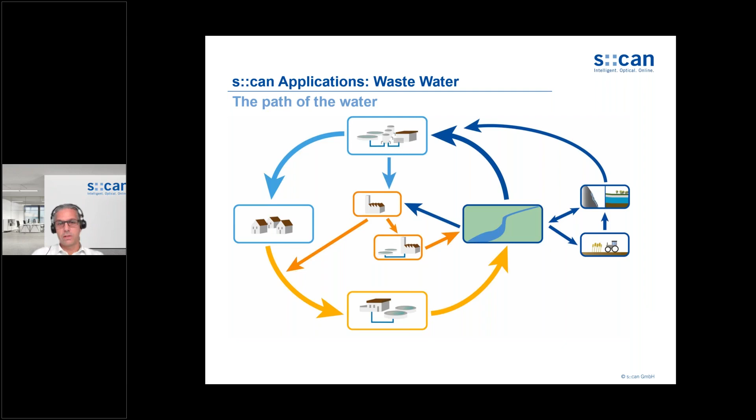At first, a short story about the path of the water, how the water circulates in the water industry.

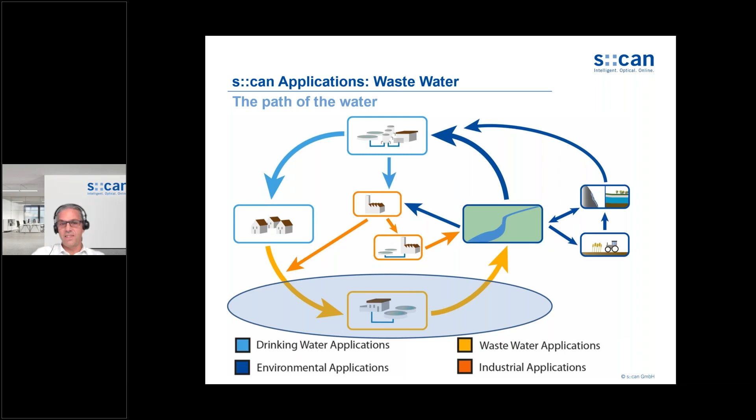The drinking water utility, you can see it on the top, produces drinking water. This drinking water is supplied to households as well as to industry, following the light blue arrows. The households and the industry consume the drinking water and turn it to wastewater—shown by the orange arrows—and this is the part we will have a look at today. After the wastewater treatment plant treats the wastewater, it's released to natural waters, and these natural waters are used again by the drinking water plants.

Here we can see a wastewater treatment plant. We from s::can can divide the wastewater applications into 4 typical applications. The first is the sewer system. The second is the influent of the wastewater treatment plant. The third is the biological treatment of the wastewater. And the fourth application is the final effluent of the wastewater.

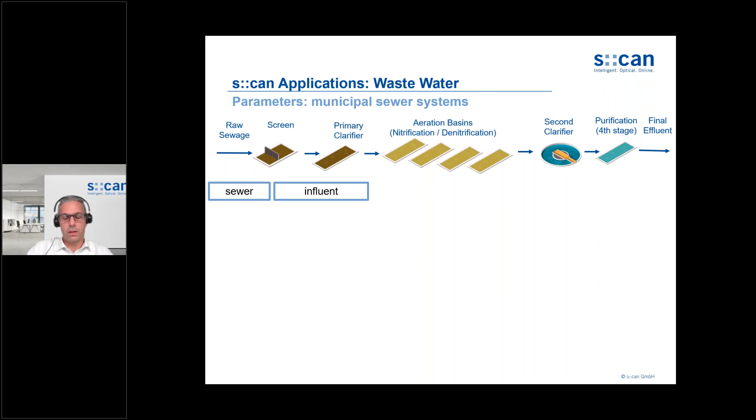Here you can see the wastewater treatment plant a bit more in detail. In the beginning, the raw sewage is cleaned by the screen and the solids are settling in the primary clarifier. These two applications we call sewer and influent application, and typically the following parameters are monitored: organics, either COD or BOD or UV254, suspended solids, TSS, hydrogen sulfide, and ammonium.

The next stage is the biological treatment. In the aeration basins, the ammonium is converted into nitrate, and the COD, the organics, is consumed. Typical parameters monitored here are the total solids, the nitrate, sometimes the nitrite, the ammonium, of course the dissolved oxygen, and the pH.

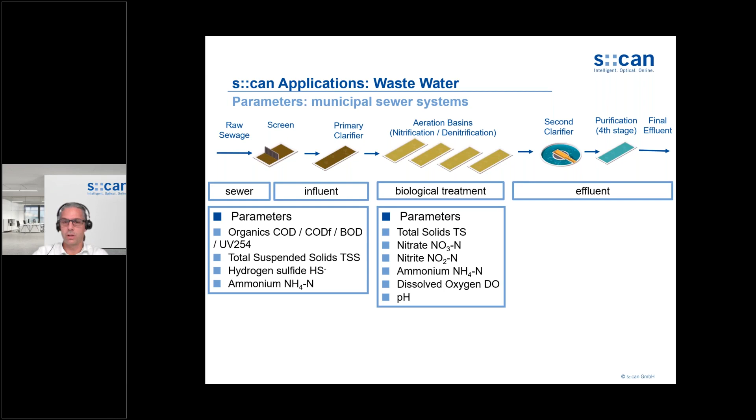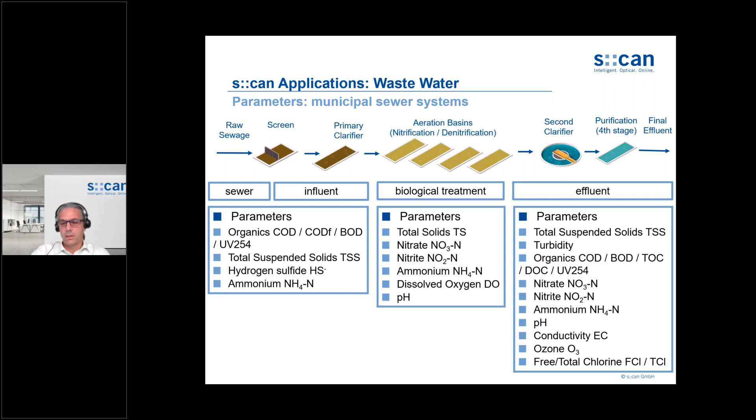After the biological treatment, the second clarifier and sometimes also an advanced treatment, the so-called fourth stage treatment, takes place before the wastewater is released to the rivers. Typical parameters monitored here are solids or turbidity, organics again, nitrate, ammonia, all the species of nitrogen, pH, conductivity, and if there is a disinfection, also ozone and free and total chlorine are commonly monitored here.

In the sewer systems, we have the following applications. We do pollution load monitoring, compliance monitoring driven by government, combined sewer overflow monitoring. This is highlighted blue because we will have a detailed look at this today. We try to detect untypical discharges, contamination. It goes up to identifying industrial discharges that are polluting the wastewater. And last but not least, prevention of corrosion damage and smell control.

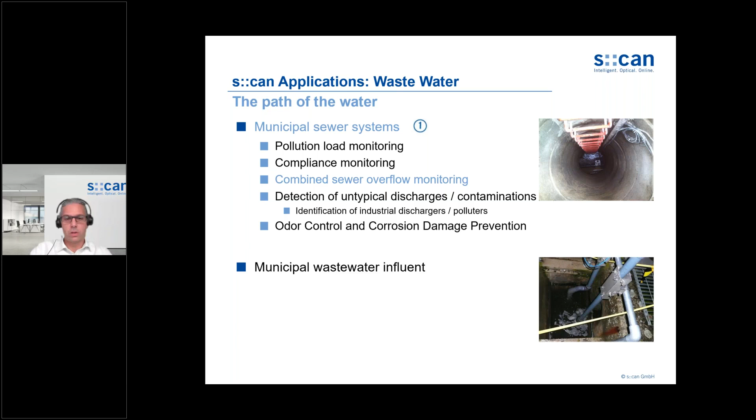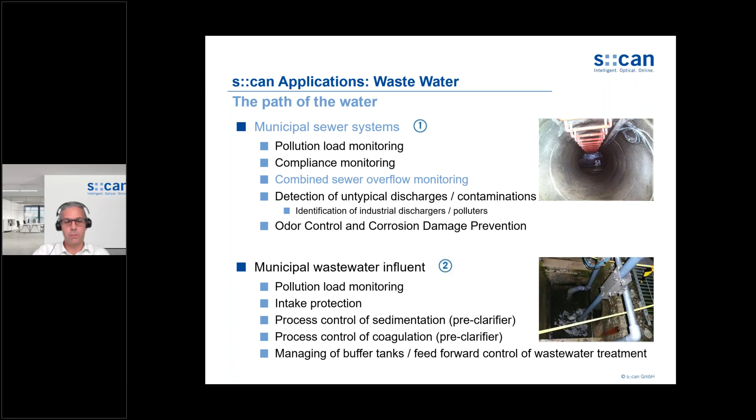In the wastewater plant, the first station is the influent. We are monitoring here again the pollution load. We try to protect the plant from too much water or toxic events, especially since the biological treatment can be endangered by toxic substances. The process control of the sedimentation or the coagulation taking place in the first clarifier can be process controlled, and buffer tanks can be managed at this location.

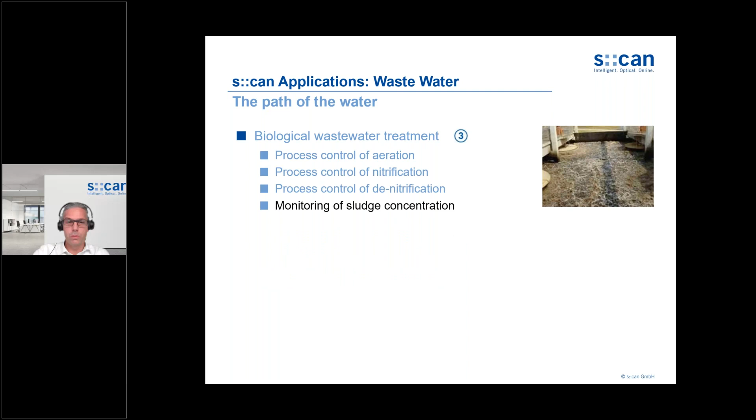Now the water goes to the biological wastewater treatment, and what we are doing here is controlling the process of the aeration, the nitrification, the denitrification, and we are monitoring the sludge concentration.

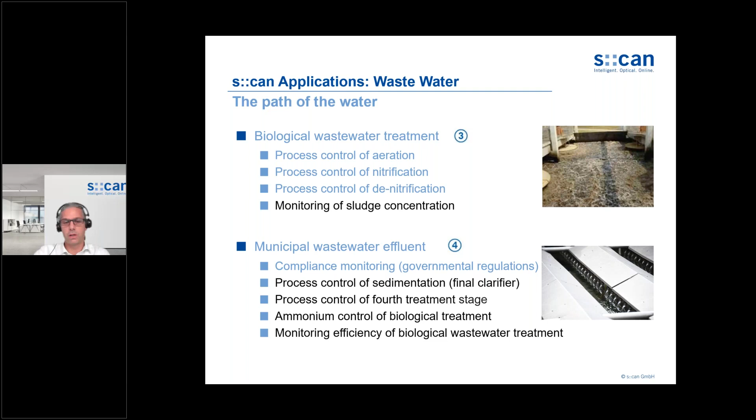In the effluent, the water is already cleaned. Compliance monitoring is a big point here. Government forces the wastewater treatment plants to monitor their effluent. The process control of sedimentation taking place in the final clarifier, controlling the fourth treatment stage if present, the ammonium control of the biological treatment, and of course the efficiency of the complete biological wastewater treatment.

Now we go directly to applications, and we start with the sewer systems, point one in this slide.

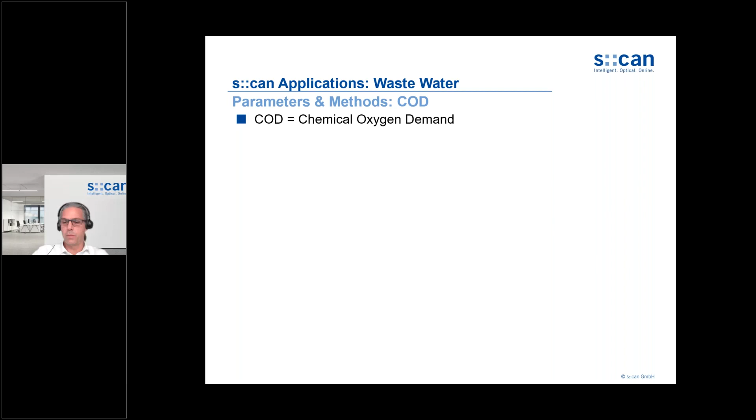Before doing so, I want to highlight the most important parameter in the wastewater world, and this is the chemical oxygen demand. The chemical oxygen demand is not a concentration of organics, but rather it's the oxygen that is consumed by those organic substances per volume of water. The method is oxidizing chemically all organic and also some inorganic compounds of a water sample, and it's broadly used as a non-specific indicator for the pollution of wastewater with organics.

The COD can both result from natural sources or from human sources, and it consists both of dissolved and particulate matter.

The COD is monitored in wastewaters and also in environmental applications to ensure the regulations of government are met, to control the biological treatment processes of the wastewater, to protect natural waters, but also the intake of wastewater treatment plants, and to monitor the COD load resulting from industrial effluents. Each and every wastewater treatment plant monitors the COD, so it's really broadly used worldwide.

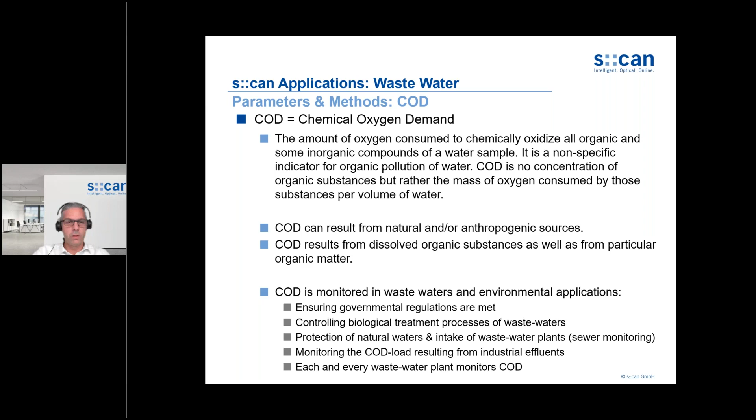The laboratory analyzes the COD by taking samples of water. The carbon is oxidized chemically, and the oxidant that is not consumed is measured. Some inorganics, e.g. chloride, can falsify the results, and many laboratories are using not the standard lab method, but rather quick tests instead.

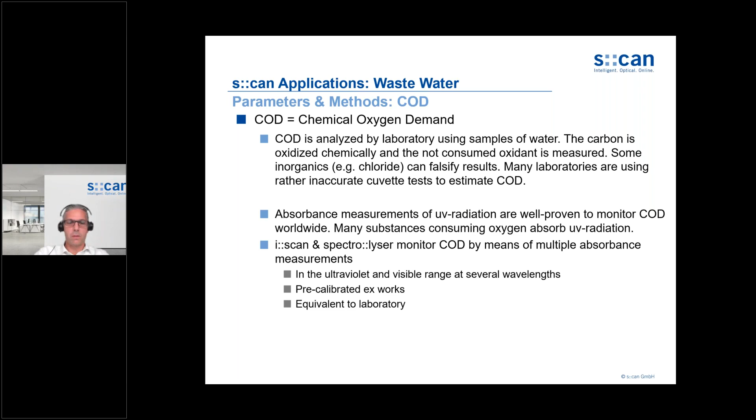Absorbance measurements are well proven to monitor COD worldwide. Many substances that are consuming oxygen are also absorbing UV radiation. That's why we can monitor it with our instrumentation. The i::scan, the spectro::lyser, they monitor the COD by means of many wavelengths of absorbance in the UV range and in the visible range. It is pre-calibrated ex-works and is equivalent to laboratory results.

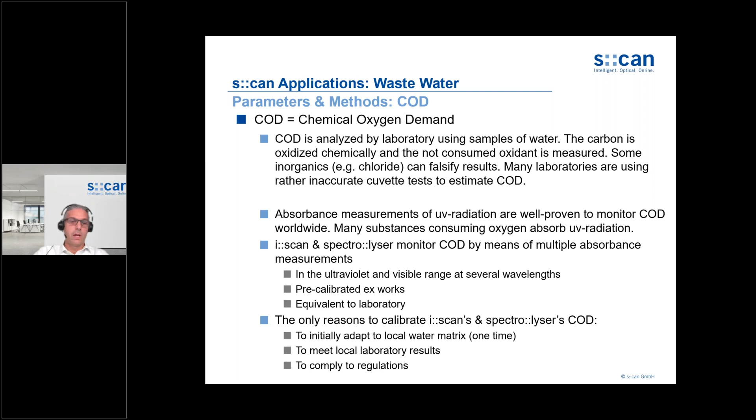There are a few reasons to calibrate the COD measurement of the i::scan and the spectro::lysers. Aging is not a reason to calibrate it on a periodical basis. The reasons are to initially adapt to the local water matrix. This is done one time during installation, to meet the results of the local lab and to comply with regulations.

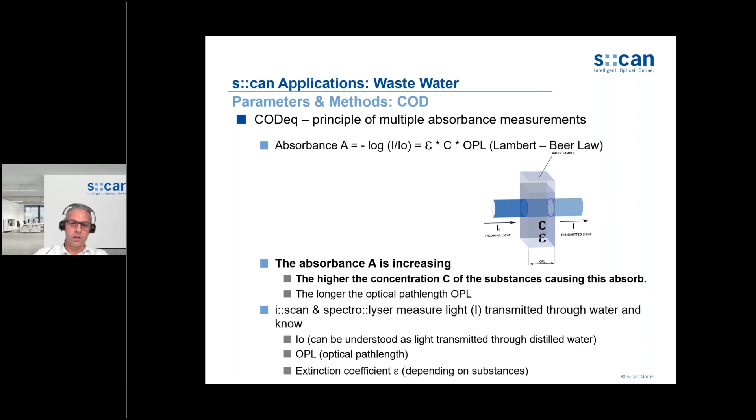Here you can see how we monitor the COD. I won't go into the details now, but the most important sentence is highlighted in bold letters: the higher the concentration of the substance causing this absorbance, the higher the reading. That means the concentration causing the absorbance can be monitored by absorbance measurement.

Now back to the sewer systems. What are the measurement goals and what is the purpose to monitor in sewer systems? Pollution load monitoring, compliance monitoring, industrial dischargers monitoring, detection of untypical discharges and contaminations, combined sewer overflow monitoring, smelling control, corrosion damage prevention, and managing sewer retention and buffer basins.

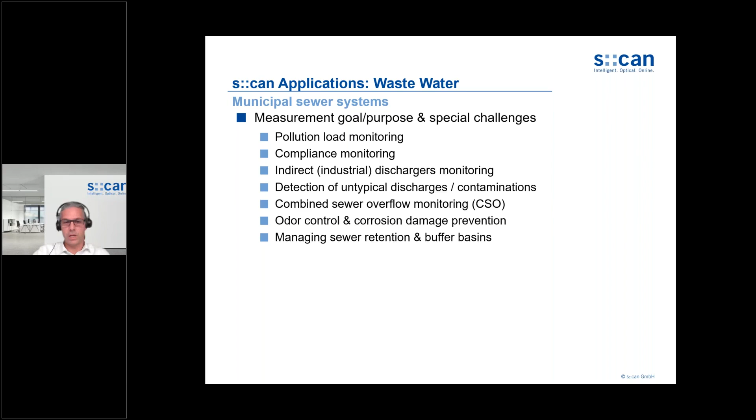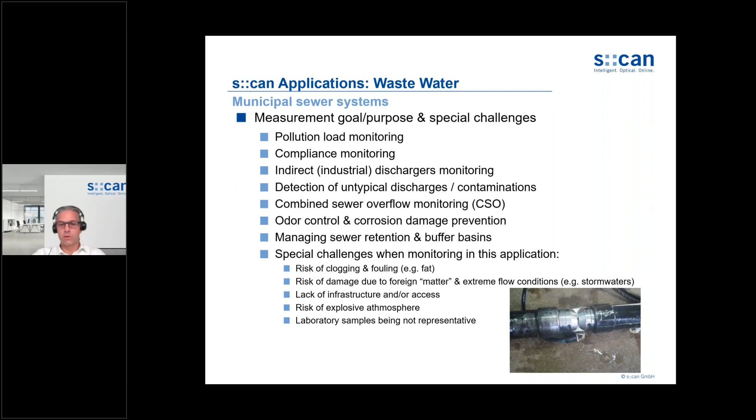What are the special challenges here? The special challenges when monitoring in this application are the risk of clogging and fouling, e.g. fat can cause window fouling, the risk of damage due to foreign matter and extreme flow conditions. We will come to this. Lack of infrastructure and access, risk of explosive atmosphere, and laboratory samples being not representative.

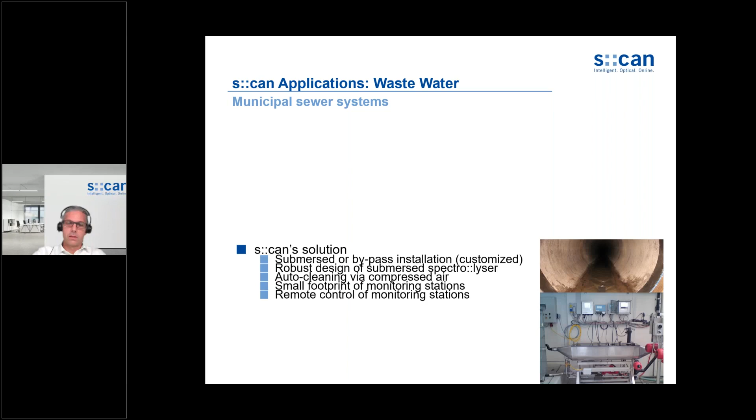The s::can solution for this application is either a submerged installation or a bypass installation. You can see the pictures on the right-hand side. The spectrolyzer is very robust in design and can withstand the harshest conditions in the sewer. Auto cleaning is typically done via compressed air.

Sorry, I was too fast now.

Victoria, may I ask you to take over, and now it's here. Of course. Can you go back one slide? Another slide back, please.

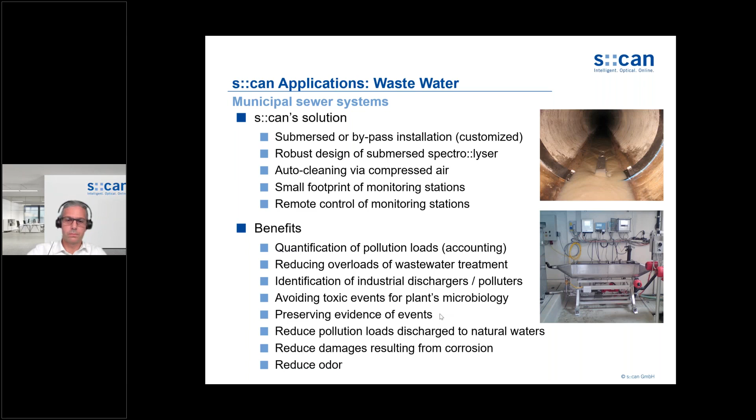Here you can see the product configuration we use typically. We use the spectrolyzer industrial, sometimes a non-standard pontoon or open tanks. You could see the pictures on the last slide.

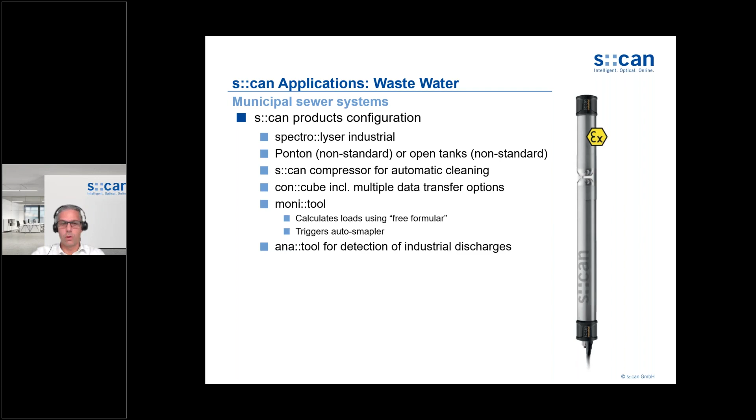The s::can compressor for automatic cleaning, the con::cube with its multiple data transfer options, moni::tool software, which can calculate loads using the free formula. That means we can simply integrate flow meters from our new sister companies and calculate the load by multiplying COD with the flow. We can also trigger an autosampler using the moni::tool software. ana::tool, the special software, is used for detection of industrial discharges.

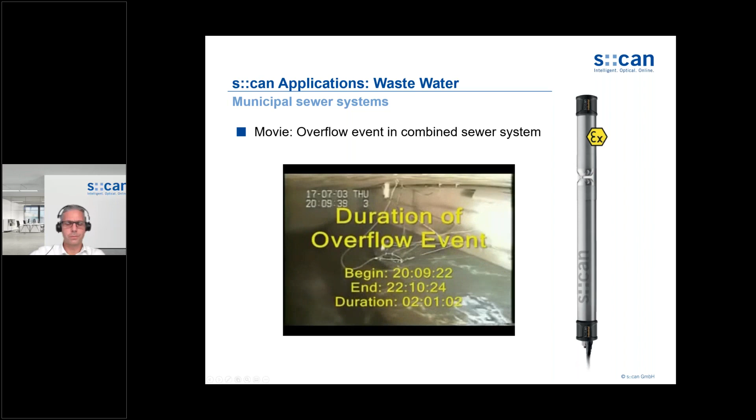Here we can see an overflow event in a combined sewer system. You can see how the water flow increases over time. The swimming boat carries the spectrolyzer, and the flow is getting worse and worse, and like a surfboard, the instrument is still running and monitoring.

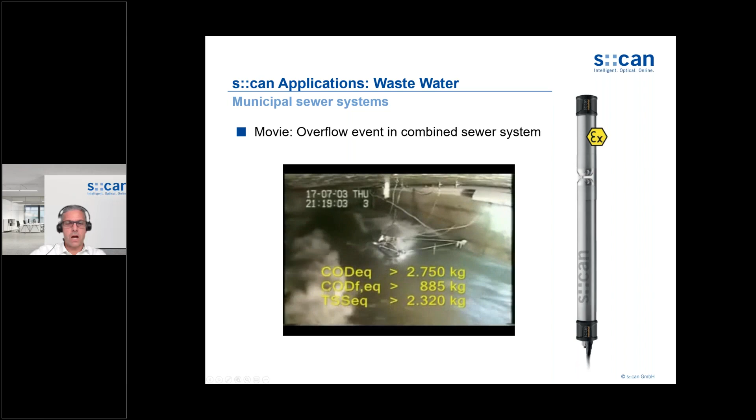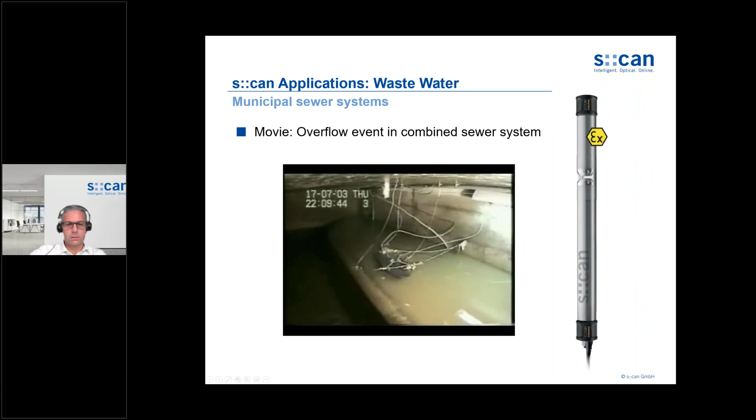Now you cannot see it anymore, but it's still there and giving results. Now the rainfall stopped and thus the flow is reduced, and finally the instrument is in good condition and did provide results all the time.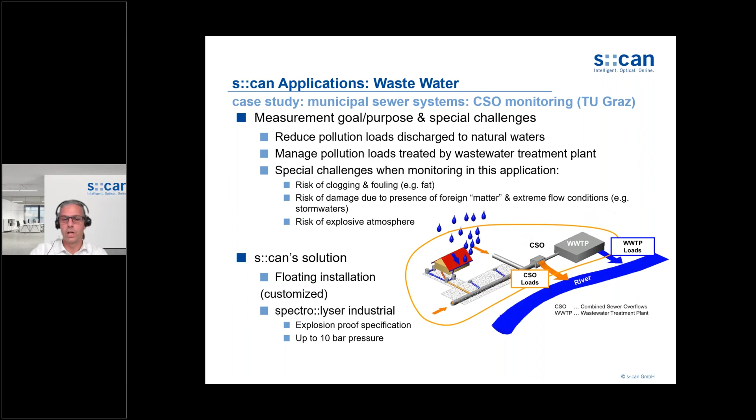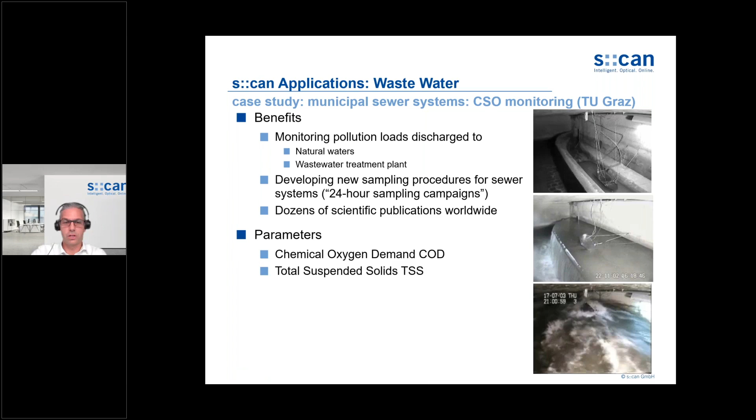Here you can see some pictures from the movie you've seen before. The benefits for this customer were to monitor the pollution loads discharged both to natural waters and to the wastewater treatment plant. They developed a new sampling procedure for sewer systems, calling it 24-hour sampling campaigns, and they published dozens of scientific publications worldwide. The parameters monitored were chemical oxygen demand and solids.

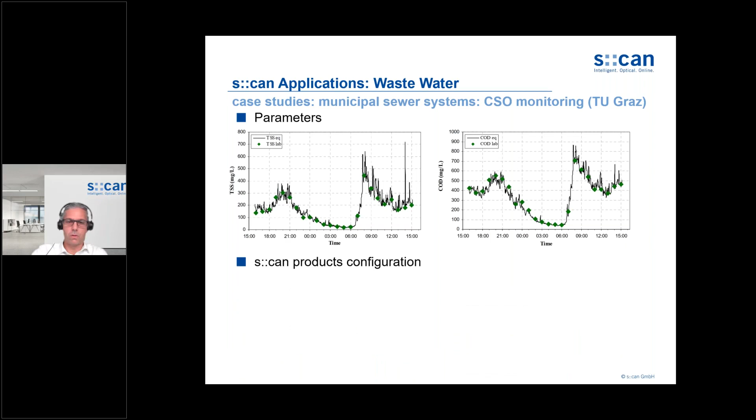Here you can see some parameter results over 2 days, and the configuration they used was spectro::lyser industrial with global calibration influent. They also did an advanced local calibration. Our colleagues supported them, and in this way we were able to match the laboratory very, very precisely.

The s::can ponton, a customized solution for installation, was used. The s::can compressor for automatic cleaning was used, and the con::stat was used—this was the older model of the con::cube nowadays.

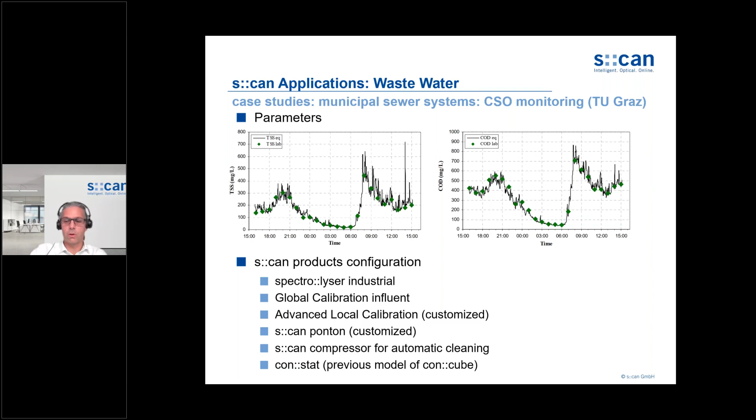The most important goal in this application is to reduce the operational costs. The blowers producing the air are by far the most important cost factor because they consume a lot of energy. Therefore, the process control of the aeration is very important. Of course, the control of the nitrification and denitrification and the monitoring of the sludge concentrations are important as well.

Special challenges when monitoring this application is that the processes of the microbiology are very fast, and therefore it's required to monitor in situ. The sensors have to be properly positioned in the basins to be able to catch really representative water qualities. Different processes can take place in one basin.

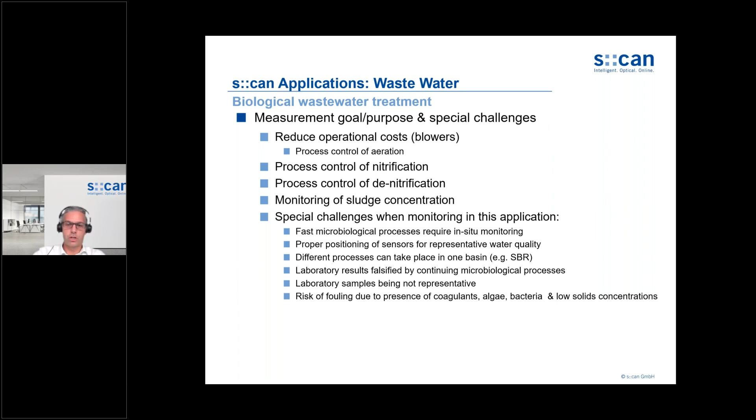Laboratory results are often falsified by processes ongoing after sampling. The laboratory samples are often not representative, and there is a certain risk of fouling due to the coagulants, bacteria, and algae, and the solids concentration being already pretty low.

Here you can see our solution is a submerged installation. There is no use to pump the water out of the biological treatment reactor. This will be completely wrong and lead to false results. And the compressor for automatic cleaning, you can see in the picture to the right that the cleaning works efficiently.

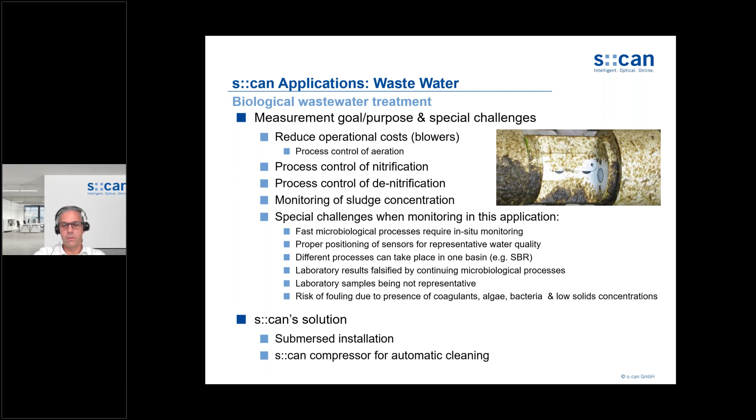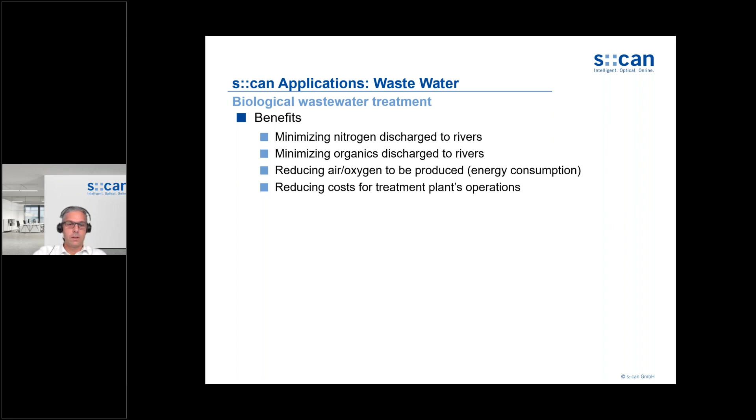What are the benefits for the customer? Minimizing the organics and the nitrogen discharged to the natural waters, reducing the air and oxygen to be produced. Energy consumption is a big point here. Reducing the costs for treatment plants operation is the main driver for this.

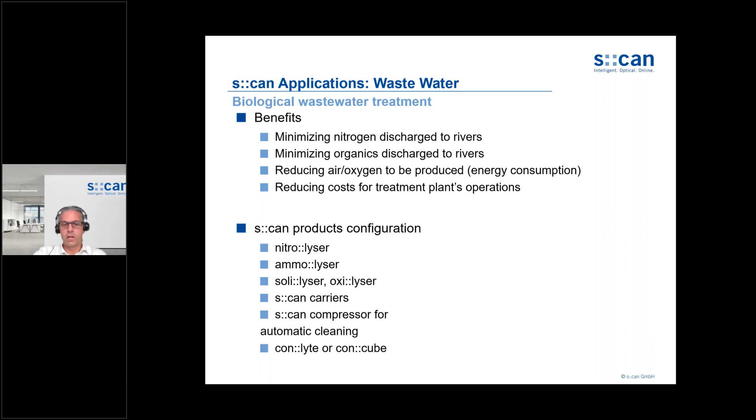Typical products we use in this application is the nitrolyzer to monitor nitrate and solids, the ammolyzer to monitor ammonia, the solilyzer for solids, the oxylyzer for oxygen. For submerged installation, we use the carriers. For automatic cleaning, we use S-can compressor. And as a terminal, both the conlyte and the con cube are used.

Here you can see some results. Red, you can see the oxygen. Blue, you can see the ammonia monitored by the ammolyzer, the oxygen monitored by the oxylyzer, and you can see the aeration cycles driving the nitrification.

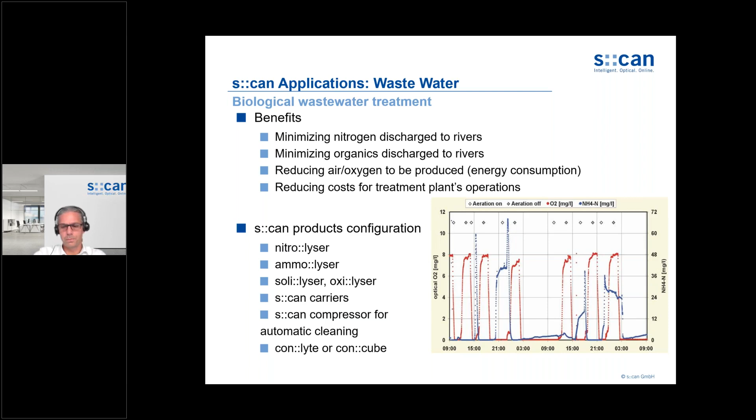A case study in this respect is a wastewater utility in Colorado Springs. As you can see here, the operators are pretty happy with our solution, and they even mentioned that they were able to lower the daily operational costs by means of our products.

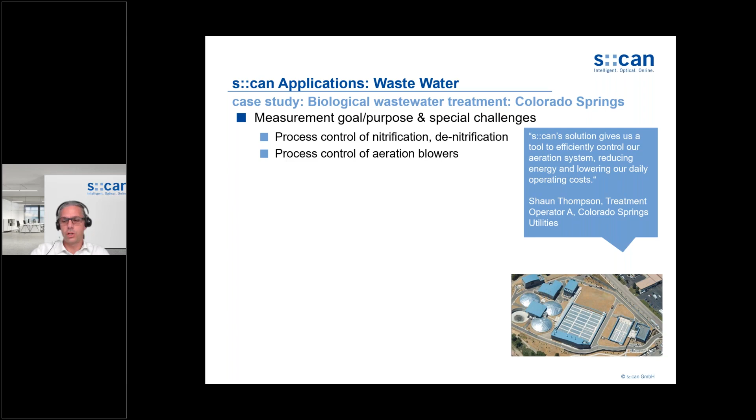What are the goals in this case study? To process control nitrification and denitrification and the aeration blowers.

Special challenges when monitoring these applications was the distance in between the sensors and terminals. Based on the design of the plant, there was a big distance in between the terminals and the sensors, and we had to overcome this.

Our solution here was nitrolyzer, ammolyzer, and oxylyzer being submerged in the aeration tanks. The data transmission was done via radios to the concube. This was a customized solution. The auto cleaning, as typical in this application, via compressed air.

The benefits for the customer were to optimize the nitrate elimination by the bugs, low maintenance efforts and easy installation, and they reduced the operating costs significantly.

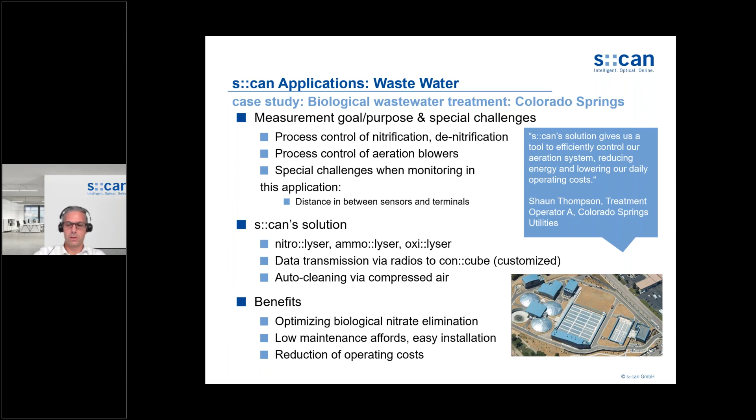The parameters monitored here were nitrate, solids, ammonium, pH, and dissolved oxygen. In the graphics, you can see green the ammonia and blue the nitrate. Dissolved oxygen is red, and you can clearly see the periods of aeration and the nitrification following exactly the periods of this aeration. Ammolyzer, oxylyzer, nitrolyzer, and concube were used in this case study.

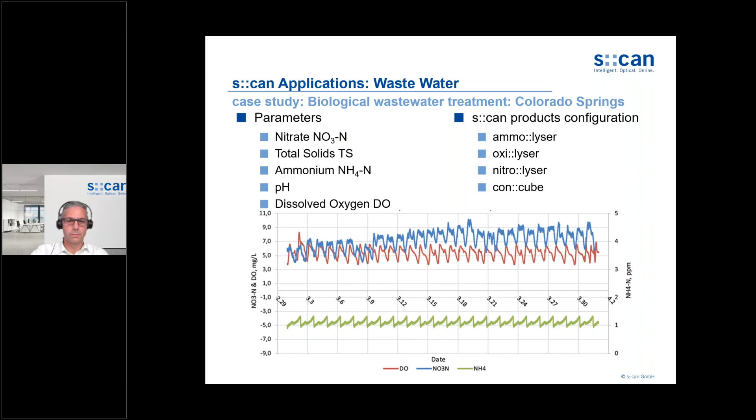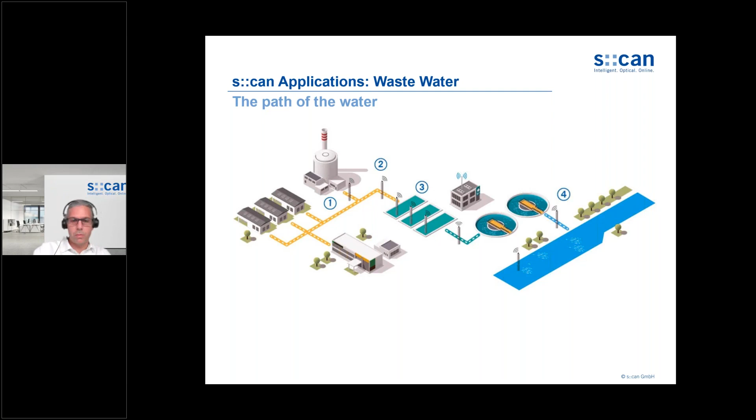Again, you can see here the wastewater treatment plant. Now we go to the last application, the municipal wastewater effluent.

What is the measurement goal and the purpose in this application? Compliance monitoring. A lot of governments force the wastewater treatment plants to monitor the quality of the final effluent. The monitoring of the biological wastewater treatment plant's efficiency, process control of the sedimentation in the final clarifier, process control of the fourth treatment stage, and ammonium control of biological treatment.

Special challenges when monitoring this application is fouling due to coagulants, algae, bacteria, and the absence of solids.

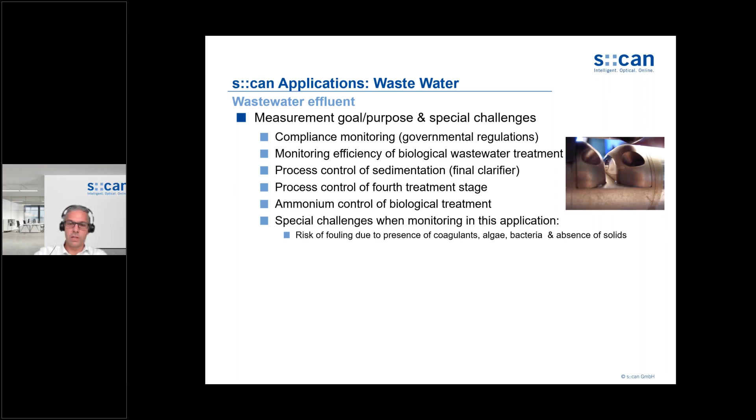S-can solution for this application is either a submerged application or a bypass installation. So both options are possible. Auto cleaning can be done via the compressor or with the auto brush.

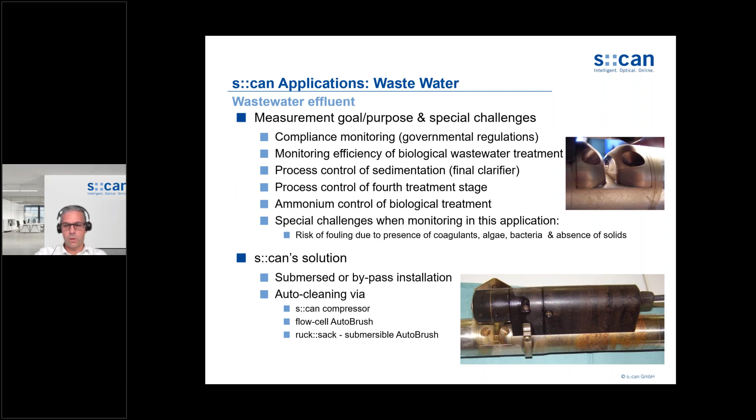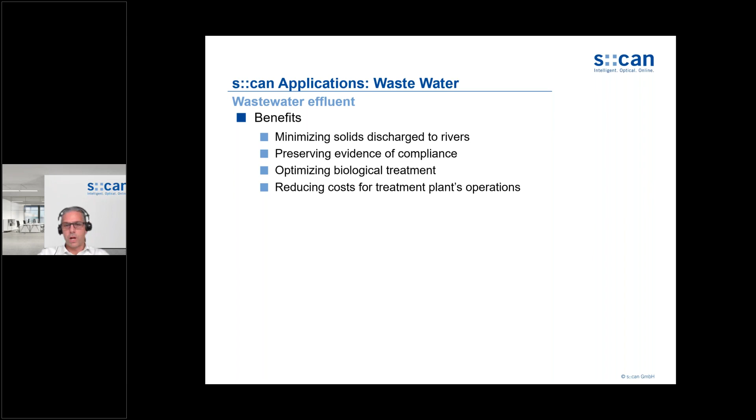What are the benefits for the customers? Minimize the solids discharge to the rivers, preserving the evidence of compliance, optimizing biological treatment, and reducing costs for treatment plants operation.

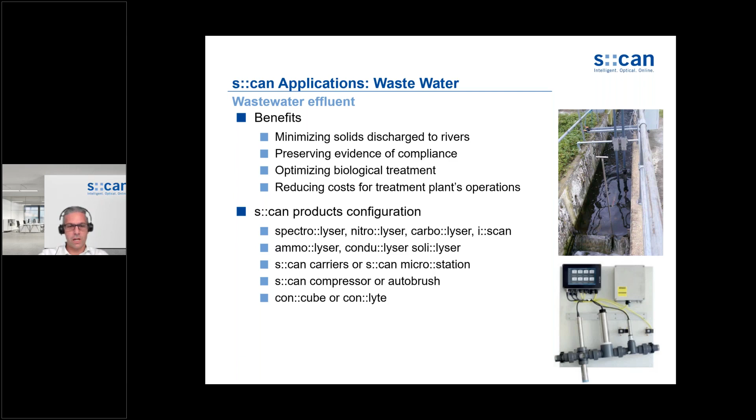Typical S-can products configured and used in these applications are the spectrolyzer, the nitrolyzer, the carbolyzer, the iScan, the optical probes for monitoring nitrate, COD, TOC, solids, etc. Ammolyzer for ammonia, condu::lyser for conductivity, soli::lyser for solids.

We use either S-can carriers for submerged installation or S-can microstation for bypass installation. On the upper picture, you can see a submerged installation. The S-can measuring devices are submerged directly in the effluent channel.

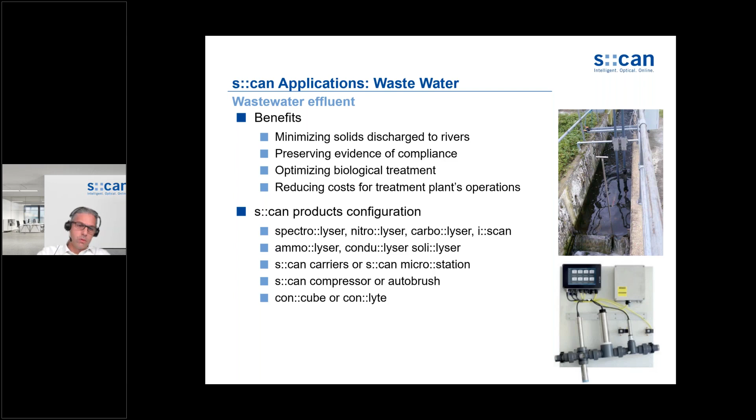On the lower picture, you can see a microstation. This is how we produce stations for wastewater final effluent in bypass. Also, the compressor can be seen on these pictures on the right-hand side. We use either the compressor or an auto brush, the con cube or the con::lyte terminal.

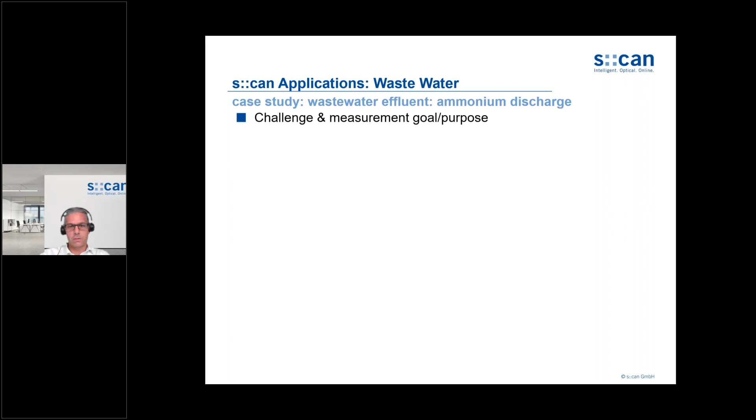We also prepared a case study for this application, and this is ammonium discharged to waters. The challenge and the goal in this application is compliance monitoring driven by the government. The special challenge is to precisely monitor between 0.1 and 5 ppm ammonia. Therefore, lowest cross sensitivities are needed, and the special challenge in this application was that the government is looking at this very carefully.

In the graphics, you can see the perfect correlation from laboratory results to the ammolyzer's results in the range from 0 to 5 milligrams per liter, and a lot of samples are below 1 milligram per liter and also correlating perfectly.

S-can solution was an ammolyzer, including compensation for pH and including compensation for potassium. So we need the ammolyzer to be compensated for possible interferences in this application. Auto cleaning was performed via compressed air.

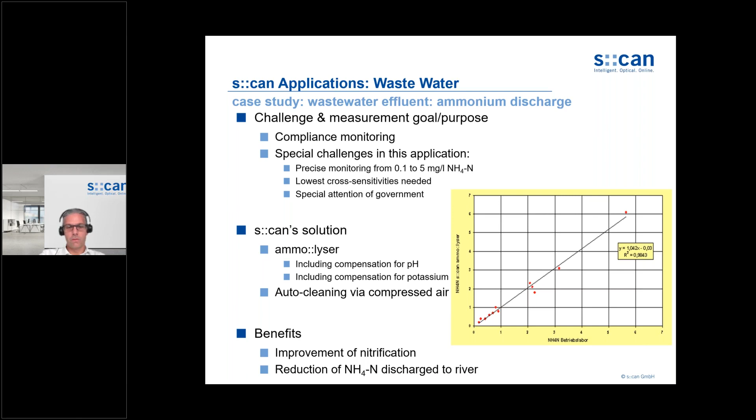Benefits for the customers was that the nitrification was improved and the ammonia discharge to the river was reduced significantly.

Here you can see results over weeks or even months monitored at this station. The ammonia is monitored in red, and you can see often the ammonia level is below 1, but sometimes there are events that are 5, 7, 10 milligrams, up to 10 milligrams.

The products we used here was the ammolyzer, the S-can carrier for submerged installation, and the terminal con::lyte for operations.

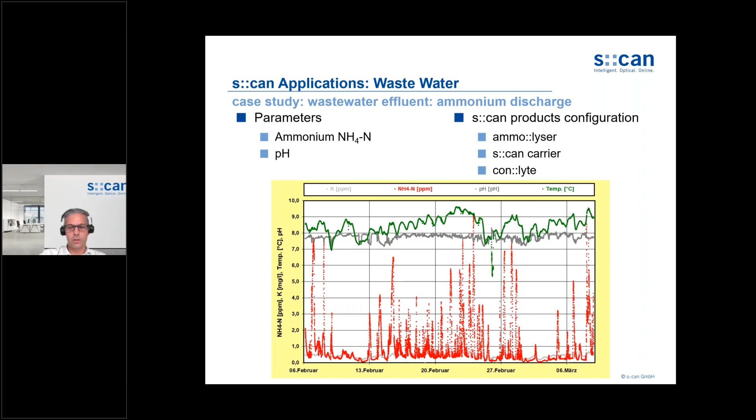So now I'm through with the wastewater applications, and it's time for questions and answers from your side. I guess Elizabeth has collected some already.

Yes, first of all, thank you, Franz. Let me thank you for this very interesting presentation and showing us such a broad range of different applications in wastewater. In the meantime, we have collected a few questions, and I would say let's get started right away with that one. Franz, which application is the most important one in wastewater, in your opinion?

In my point of view, the most important one is for sure the biological treatment. The first reason is it's commercially the most important, because operating the blowers consumes so much energy, and reducing the amount of oxygen needed, or optimizing the process control of the blowers is by far the best method to reduce the operational costs. And there are studies saying that up to 70% of energy can be saved if the aeration tank is